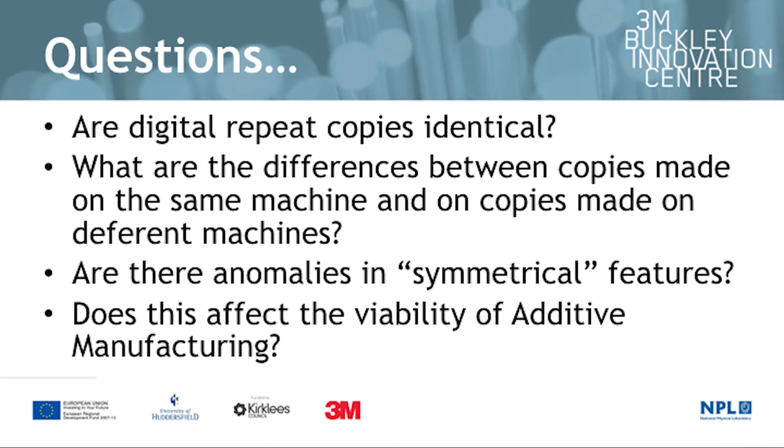Also asking, are there anomalies in what are apparently symmetrical features on an object? And does all of that combined affect the viability of additive manufacturing as a serious manufacturing tool? It's quite a provocative statement.

Okay. We've done this work in conjunction with the National Physical Laboratory. Their main offices are in Teddington in London, or just outside London, but we are lucky in the 3M Centre in Huddersfield to actually have their northern hub, which means I don't have to go very far to have very accurate measurements taken. We've used as an example object the NIST, that's the American equivalent of NPL, the National Institute of Standards and Technology in the United States.

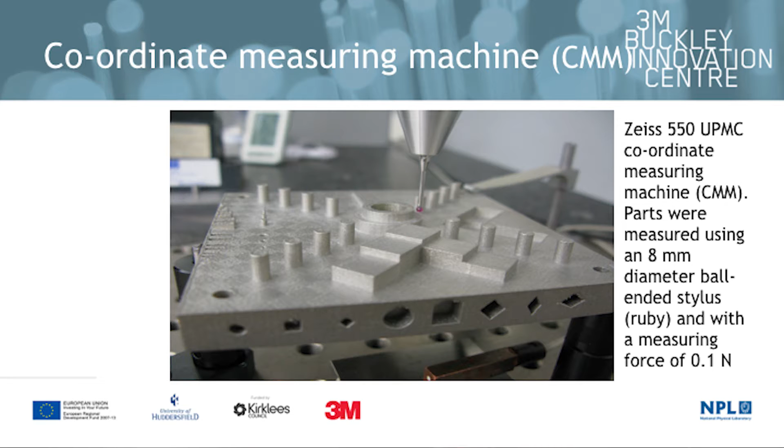They have a standard 3D printing object, and there's an example of it on the slide behind me. It's a particularly uninspiring object, but it is very well characterized in terms of its dimensional analysis. So it makes a very good tool for the analysis here. Now, if you'll bear with me a second, I've got some of these I brought with me.

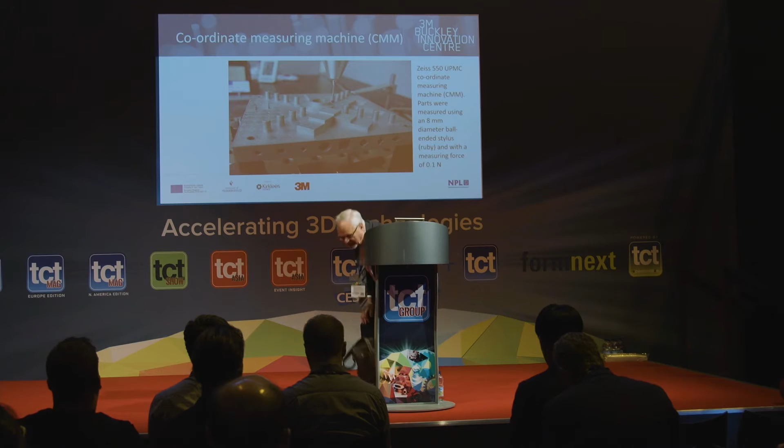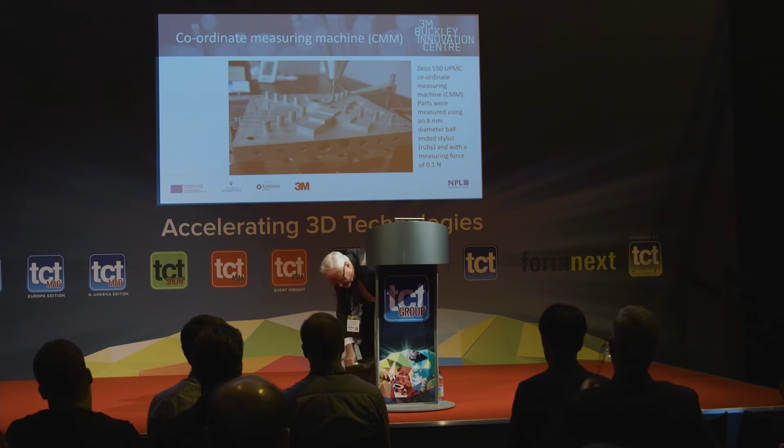Right, I have here, I usually try and do this talk a bit like a TED talk, and I throw things into the audience. I've lost too many members of the audience by throwing this one.

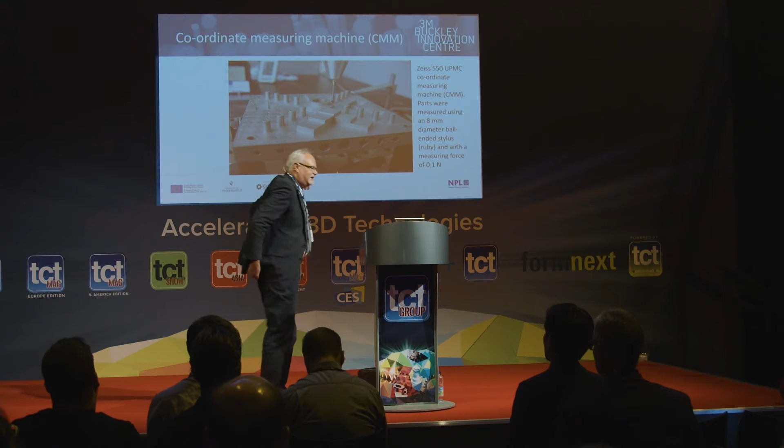This is steel. It's quite heavy, but there is a plastic one here that I prepared before the show. This is an SLS version, and I will pass this round. Here we go. That is the NIST standard object. If I threw the metal one, I might kill somebody. I can pass it round if you like. Excuse me. There we go.

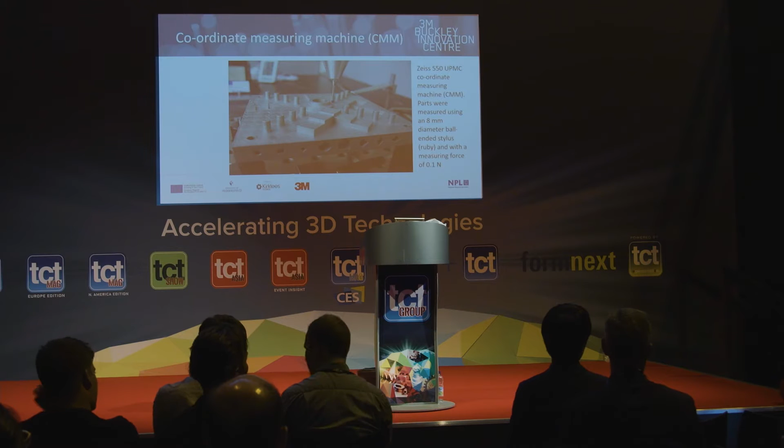We looked at 3 plates, we're calling these objects plates, 3 plates that are made on the same machine, one after the other. And we also looked at 3 other plates made on different machines by different manufacturers. Now, I won't mention who made which. I am grateful to the manufacturers, and if there are any of them in the audience, I can see one at the side there, I'm very grateful for the work they've done on our behalf. I'm also grateful to NPL. But there is a lot of data there. So I've simplified it for this afternoon.

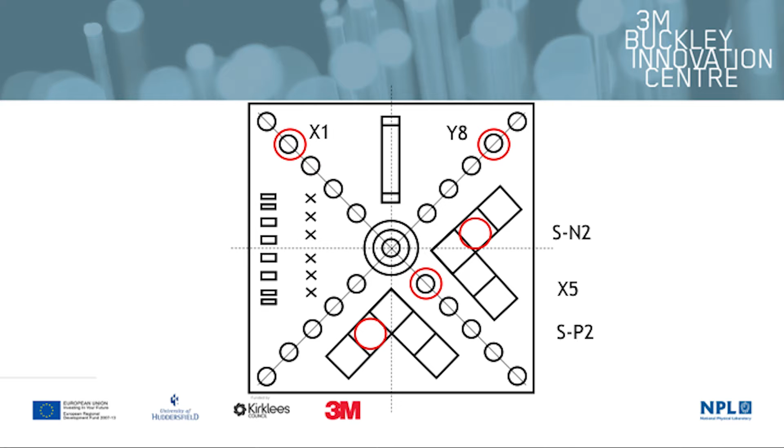We've looked at 5 features. And on the chart, we see X1 is a vertically upwards pillar. Y8 is a similar feature, and X5 is a similar feature. The difference between those is where they are on the plate. So X1 and Y8 are near the perimeter, and X5 is near the center. SN2 and SP2 are identical but opposite features. N2 goes down into the plate, P2 goes up. Okay.

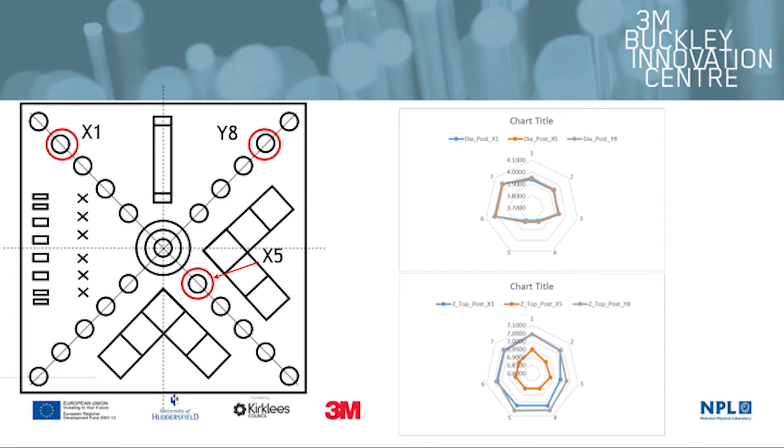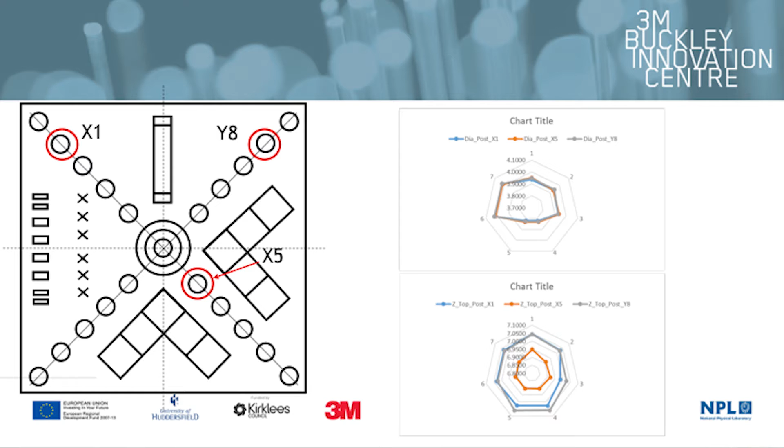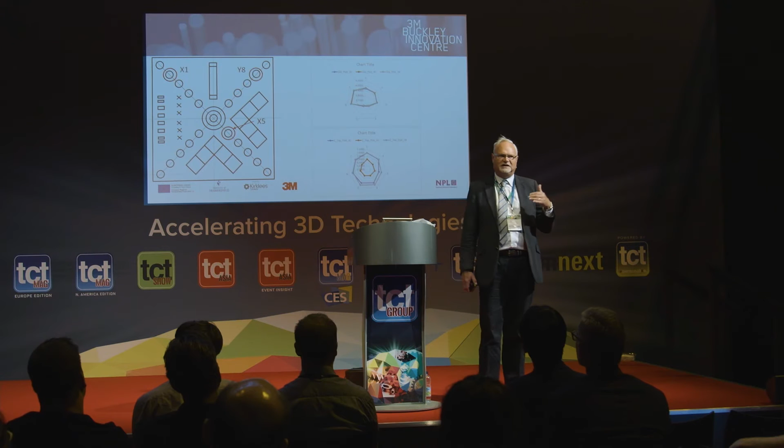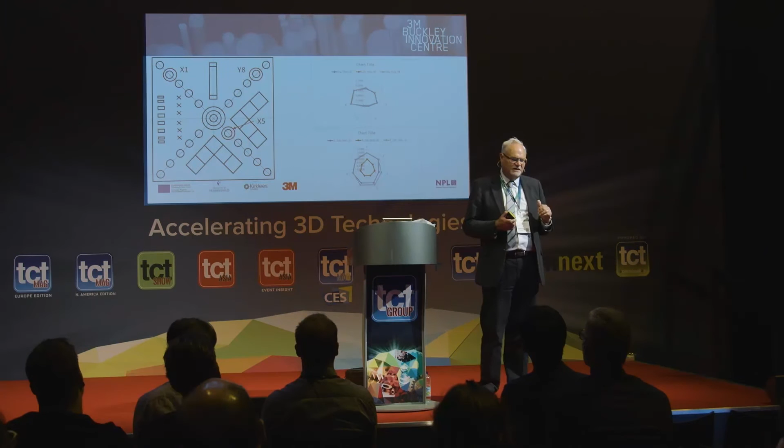We added into that Y8, just because it's exactly identical, if you like, to X1, it just happens to be on the other side of the plate. What you can see there, again, the diameter of the feature, it is a circular column, remains virtually the same for each of those 3 objects. But again, as in the previous one, the X1 and Y8 on the outside edge of the build are virtually the same, but the flatness of the top of the post near the center, it's slightly lower. We're talking about a very small difference, but it is a difference that can be measured.

Okay, I'll skip through this very quickly. Effectively here, we're looking at the feature that goes into the plate and a feature that comes up out of the plate. Again here, the positive, that is the one coming up out of the plate, fairly good agreement. The one going down, fairly good agreement.

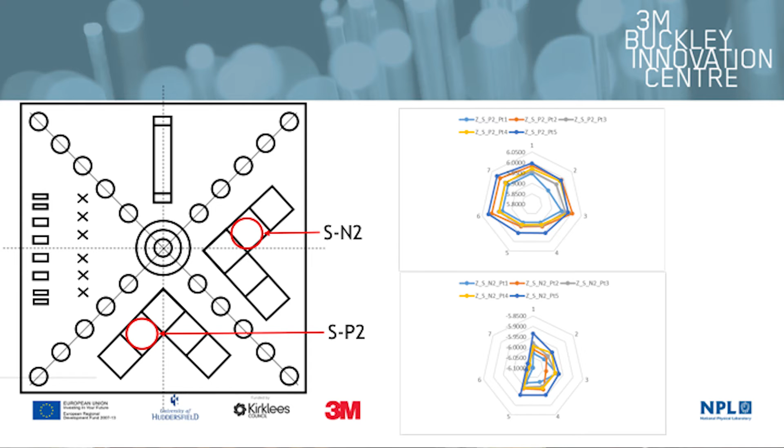Interestingly enough though, the graph at the bottom is showing you that the plate, the bottom of the well that you've created in the metal, isn't flat. It's because on one side there, it's actually a different height from the other side. So there's a slight incline on that plate.

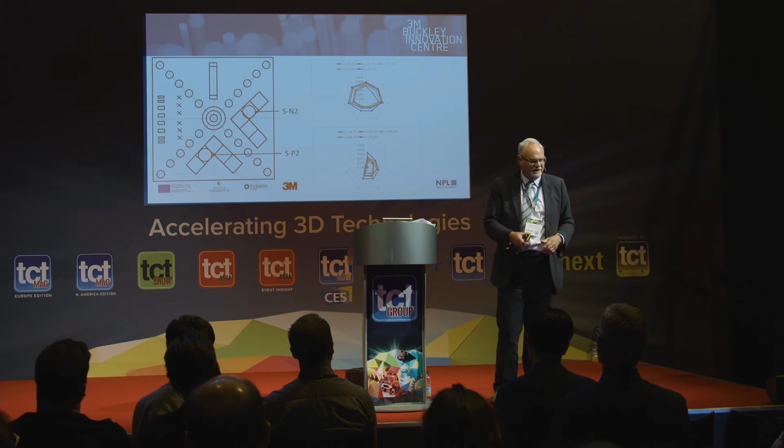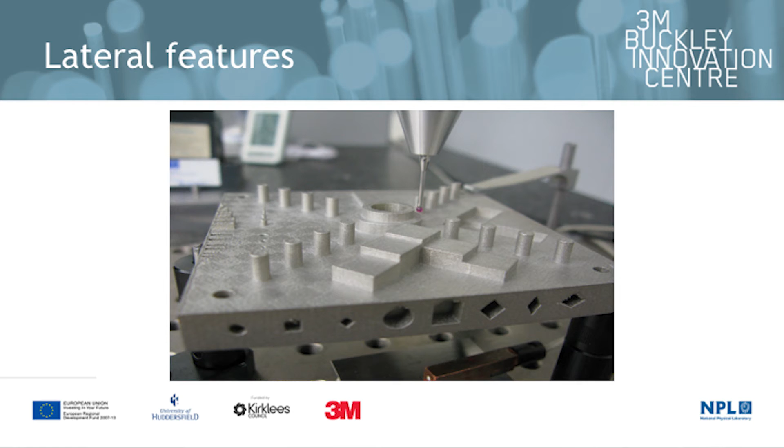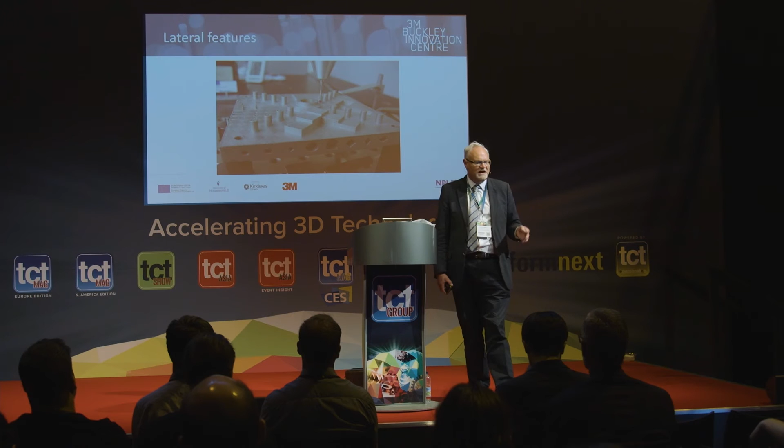One of the other things that we've looked at is the lateral holes in this object. And you notice along the side here in the picture, there are a number of shapes that are horizontal in the side of the plate. We've taken the data, and again I've filtered this data for this afternoon to cut down on how long I speak, obviously. We've concentrated on the circular hole.

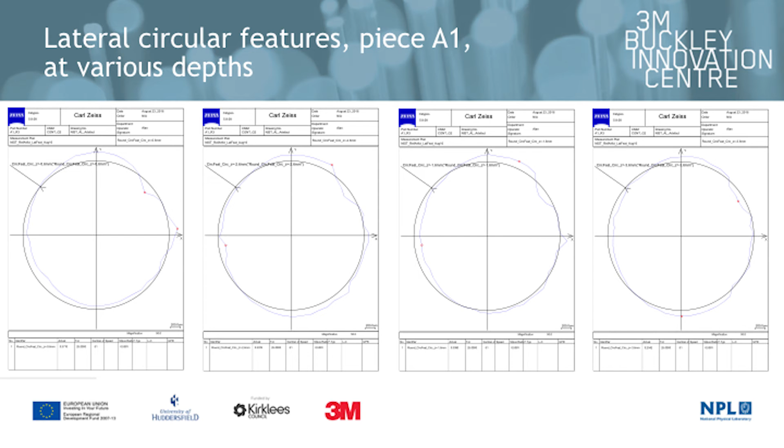Circular hole here, this is for piece A1, that is one of the triple pieces made, the first one made, and you can see here that the solid circle is the measurement as reported. In other words, that's what it's supposed to be. But you can see on all 3, this is at various depths down that feature, that it isn't quite circular. Now again, it's a very slight difference, but if you are engineering something for precision, this could make a difference.

Equally, it's interesting, I think, that if you look in the Y-plane, that's the up-down plane here, there is a slight tendency for the shape to be distorted upwards. Now this could be something to do with the recoating process in metal AM, might not be, we haven't got enough data yet, but it could be.

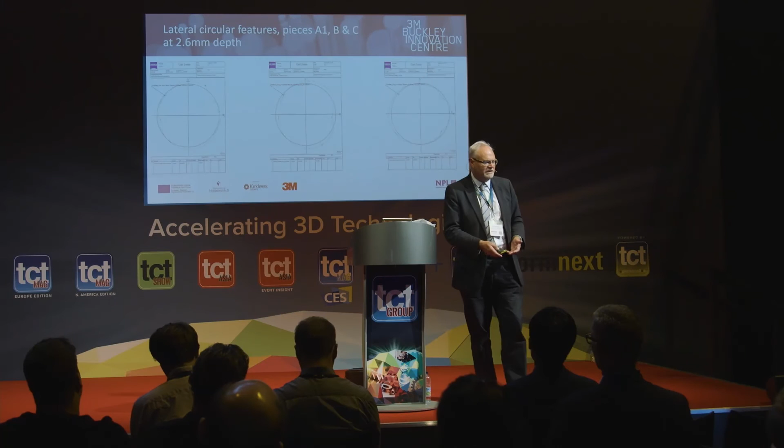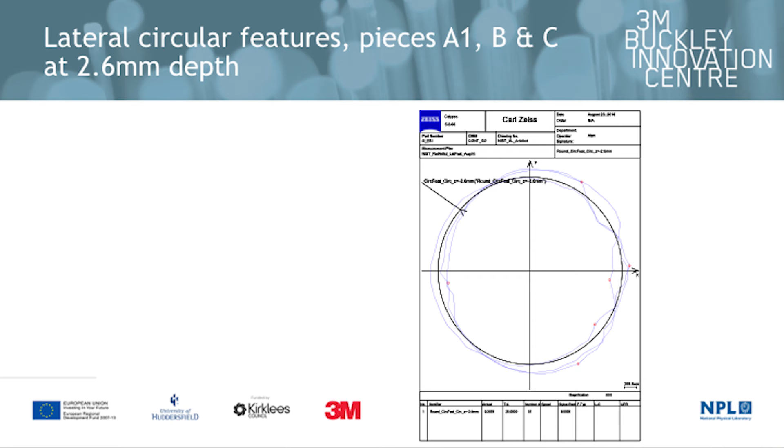Okay, again, more data looking at objects from different machines, and again, if you superimpose them, in this case, you see that there is more difference between the objects than there was with 3 objects from the same machine. But again, a very similar pattern of distortion.

Okay, finally, going back to the questions that I set out at the beginning, is the assumption that repeat copies are the same? The answer to that is no, they're not. They depend upon the conditions pertaining at the time of the actual build, the machine that's being used, and also all sorts of other variations. It's not a good assumption to say that digital copies are identical.

There are anomalies in the symmetrical features. There are anomalies, such as I showed you in the previous slides, of slight distortions depending on the way the object is built up. Additive manufacturing is a cornerstone technology. I don't think there is any doubt about that. You only have to walk around outside this hall to see that there are scores of companies now investing heavily in the digital manufacturing process.

We ourselves are in the process of purchasing something in the order of £750,000 worth of equipment. And we would not be investing in it if we didn't believe in it. But I think you have, and our clients already do, to realize that there are limitations to it. You have to work within those limitations.